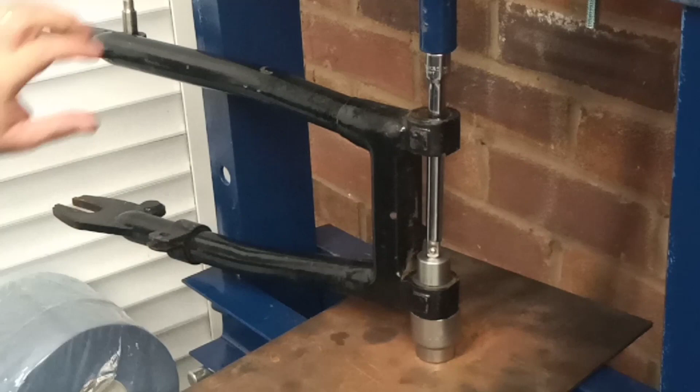Right, welcome to Retro Circus. Today's star attraction is Dino the Juggler, and I'm going to try and keep all this lot in line while I press out the swinging arm bearings. And I've got the special tool that I made in here. I've got a 1.1/8" socket down here to catch the bush and to support the bearing flange, and a socket extension going through the middle.

And we're doing it like this because, if we try to press from the top, this being an open H sort of format, then we'd absolutely distort the swinging arm at that end, I would think. So hopefully this won't take much force to go. Well, I'm going to get out of the way just in case. There we go. Not too bad. Not too big a bang, really.

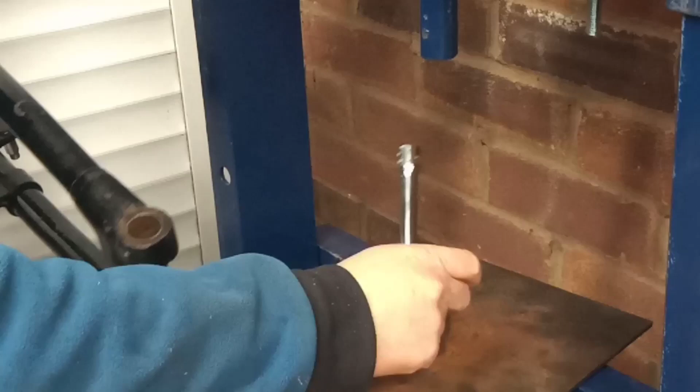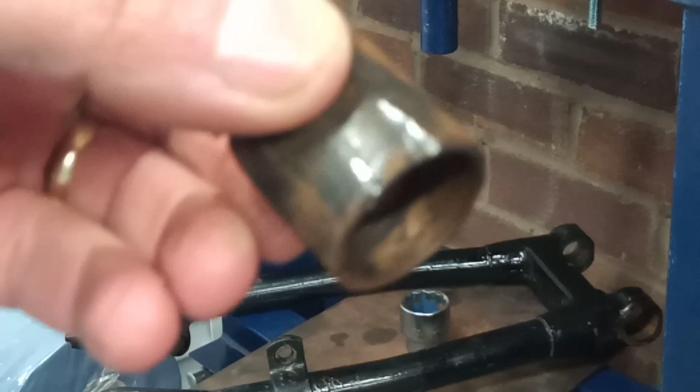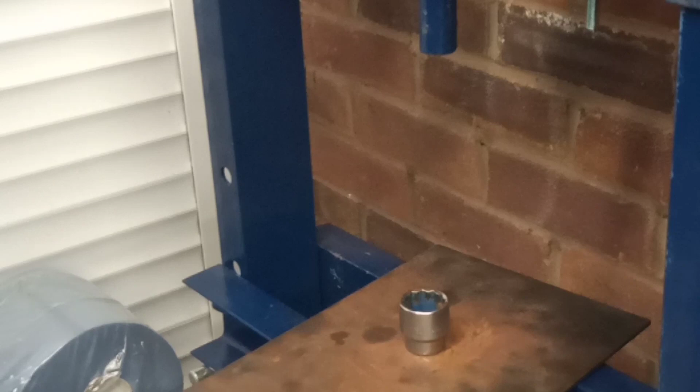There's one. I think that's probably never been out of there. I imagine that's the original one. There we go. He took a bit of going, didn't he? But he went. Right, let's get the other one out. We'll do exactly the same again. Let me just back the jack off, which we've done. And do it all again. I was quite pleased with that, actually. Worked very well.

So if you can hear a bit of background noise, the camera tripod is right above where the workshop heater is. So you may just be picking up the fan from the workshop heater, but hopefully it won't spoil your enjoyment. It's absolutely freezing here at the moment. It hasn't been above about -2 for a couple of weeks now. So yeah. Proper winter weather.

I'm not happy with that. Let's just get that socket a little bit more lined up. I'm not happy with that at all. It's all a bit on the wonk. That's better, more natural. A bit more central. There we go, I think that'll work.

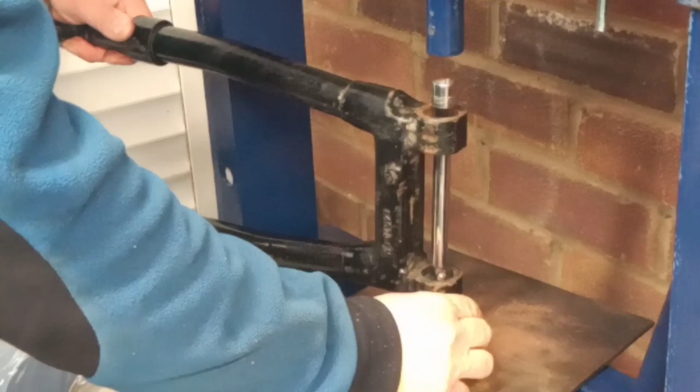It's wanting to wander about. Oh, that was just my big box of press tools at the bottom moving. There we go, that should work. There we go, liberated. Okay, well, it worked. Happy days. There's number 2. Again, I don't think that's ever been out, but you never know. Okie doke, we'll get the swinging arm cleaned up, get ready to put the new bushes back in.

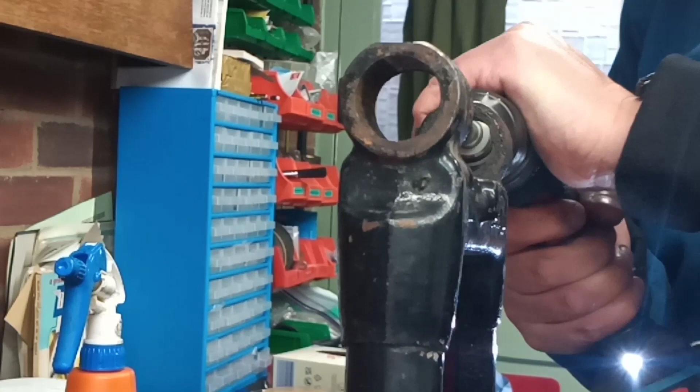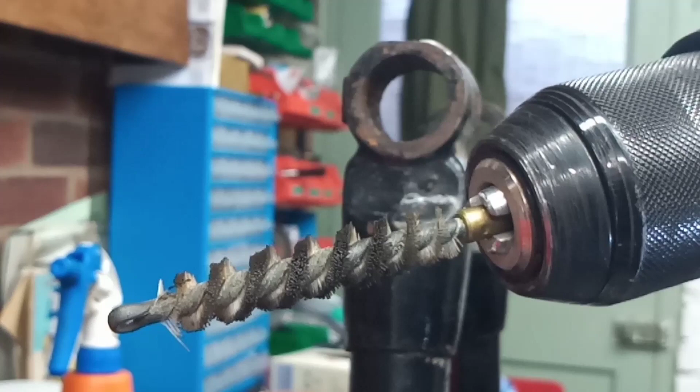Okay, I'm just going to clean out the bores. If you want to know what I'm using, it's a gun cleaning brush, part of a gun cleaning kit, in an electric drill, and because it's really stiff, can you see that? Really stiff nylon bristles, it doesn't do any damage to the metal at all, but it really cleans them lovely. If you've got any sort of bearing bores or anything like that that you want to clean without damaging them, these are ideal. It's just a spiral gun cleaning brush.

You just give it a bit of a going and then wipe it out with a bit of your squirty oil and a bit of workshop wipe. It's perfect. Gets all the rust out, doesn't damage the metal, and is ideal for the job.

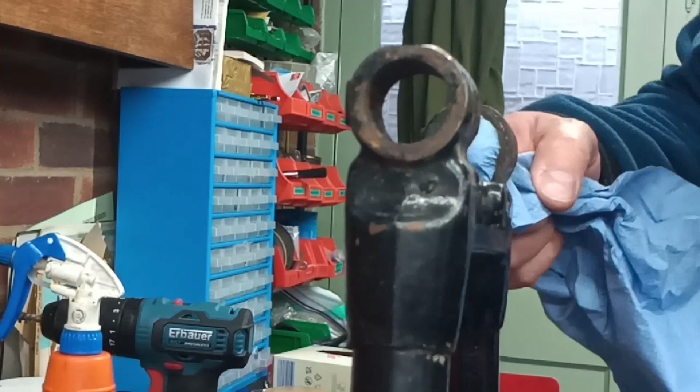So, just do this one. I don't know if I can keep you there. I might be able to. You'll be able to see it do its job. Can I get in there with you there? Maybe. That ought to do. I'll see if I can get the camera to look down there in a moment. They were pretty rusty in there.

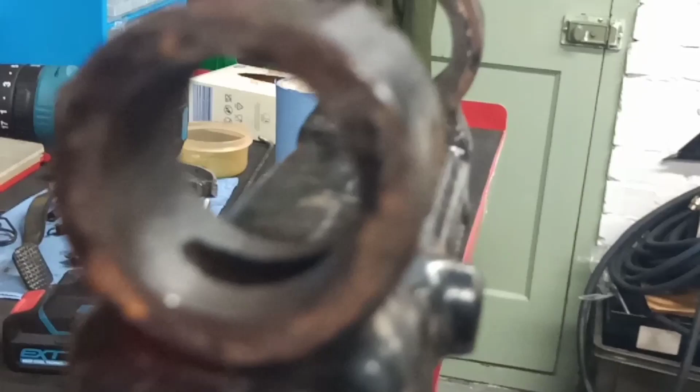There we go. Let me see if I can get you to have a look down there. Excuse me manually operating the camera. I don't know if that's going to focus. Well, yeah, all the rust's come out. It's just clean metal now. So we should be good to put our new bushes in.

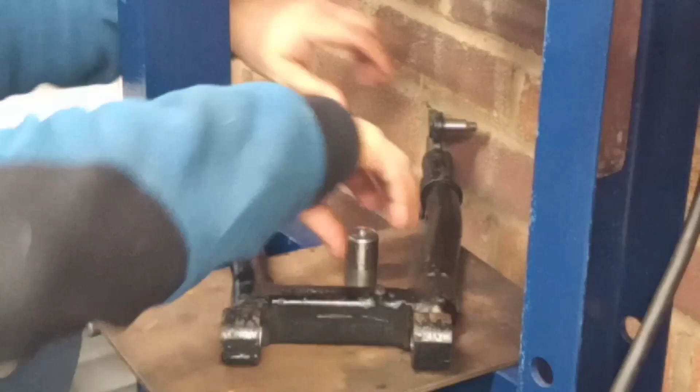Right, we're back again. We're going to put one of the new ones in, and I've warmed it up a little bit, just because I think the minimum amount of resistance we get, the better, really. Which one did I warm up? That one. So I doubt it'll make much difference. Oh, it's going in a bit easier. Starting easier, so that's definitely made a bit of difference.

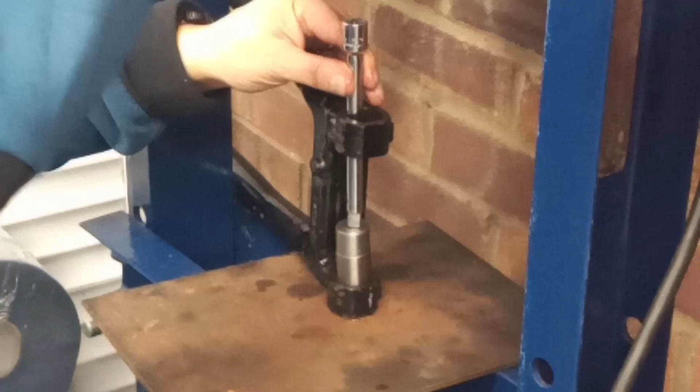Okay, so put our rod in, and we'll get the jack in position. I'm hoping that you've seen all this well. Let's just see if we can get this a bit more square before we start putting force onto it. No, that's not going to play. I think I need something a bit chunkier than this socket extension, perhaps. So one more go. If it doesn't work, it doesn't work. We'll get something else.

Okay, so that's starting off reasonably square. Might help if the swinging arm is out here, so I can handle it a little bit better. Oh, I think that's better. I think it's just where I had the swinging arm. I was just in a bit of an awkward place. Put a little bit of grease around the outside surface of the bush. You notice I've got no socket underneath now because I want to come to a dead stop. Which is where we are.

Okie dokie. Success! Let me get you a view of that. There we go. A little bit of grease pushed through. And that's one done. And I shall do the other one off camera because you've already seen it. So get the other one in and then we'll see what we're like for dimensions.

Right, well, we have our swinging arm up in the vise, and there's our two bushes that we just fitted over at the press. I don't know if you can detect a slight hint of shininess right around this edge here. I did find that it raised up a little bit of a burr, and I just had to remove it. I used the edge of this needle file as an improvised scraper, and I just went in there and took it out. And it's nice and smooth now. You can run your finger around, so no problems there.

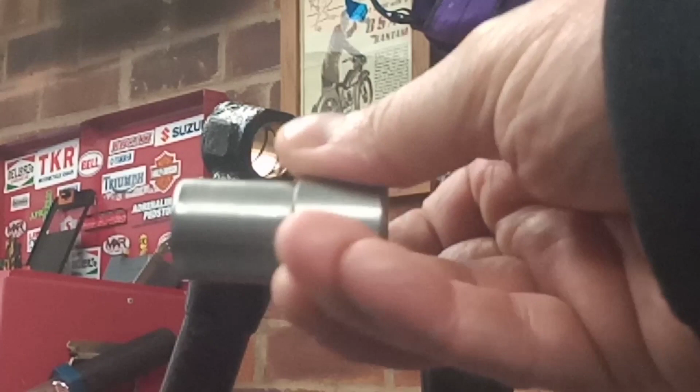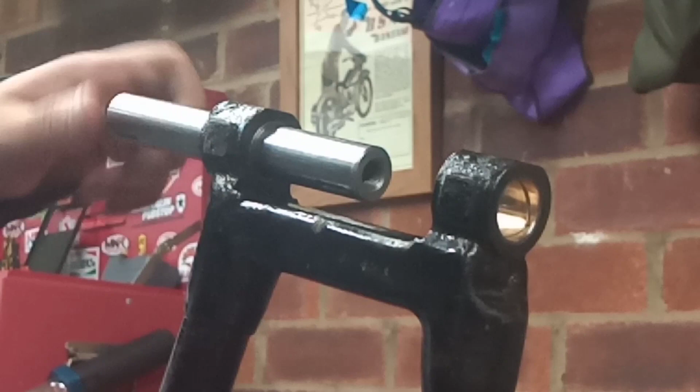But I'm really happy because I have had the pin fitted, and let me just show you. You'll recall that we used our guide tool, which was a good close fit, to try to prevent the bushes from closing up, and I warmed the housings up slightly before I pressed them in, the flanges, and that's a really nice fit in there. And then we get over here, and with just light thumb pressure, it's in. And I can rotate that by hand. There's a bit of drag on it, which is absolutely fine.

If I was going to ream it, that would be the fit I would be going for. I wouldn't be going for anything slacker than that, because that will work perfectly well, particularly when it's greased up. You want a tiny little bit of drag, and yeah, I'm really happy with it. That's absolutely spot on. So let me just press it out, and as you can see, I just use my finger to press it out, so it isn't a tight fit or anything like that. But yeah, I'm really happy. So we don't have to do anything else to that.

And guess what I did? In anticipation, I actually did buy a reamer, and I said I wouldn't, didn't I? But this fella came up for £8 second hand, and once I cleaned all the swarf that the previous user had left on it, this is what we're left with. It's a couple of edges on the blades, could probably do with a little tickle on the stone, but apart from that, it's like new. You could use that straight away and get away with it.

Of course, you couldn't just whack this reamer through there, because the whole point is that you're reaming them concentrically. So the plan was to make a conical guide, a pilot, and if any of you remember kingpin reamers, if you've worked on old Morrises or Commer vans or anything like that, you'll know what I'm talking about. That was basically the plan, but I don't need it. However, I do have another swinging arm in here that needs to be done. I've nothing to use it on at the moment, but I'm going to do it anyway. So I'm going to make the kingpin guide for our adjustable reamer.

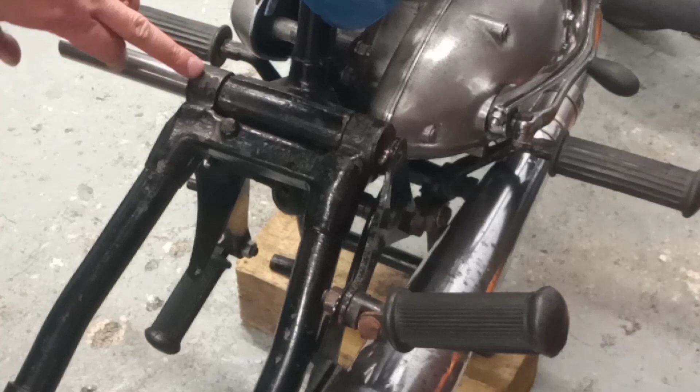Right then, lovely people, I've got you up on the parts washer, peering down at the back end of the bike, and what we're doing is checking the end float, or side float if you prefer, on the swinging arm. As you can see, it's partially fitted. We've got the pin through the offside eye end into the offside part of the frame, sufficiently in to hold everything nice and square. We're hard up against the offside side of the frame lug, and that puts us on the centre line. And here we have a gap.

That gap is controlled by a thrust washer. Let me just get the caliper - because I've already been... nope, let me just drop it on the floor first, that's always the first sequence of events. Right, clean it a little bit. There we go. So I've already been measuring things, and we have got 65 thousandths on our thrust washer.

And then I've got a feeler gauge stack here which measures 70 thousandths. And if I hold that, take a little bit of the weight off the swinging arm, make sure it's nice and square - I don't know if you can hear that, I'll try and exaggerate it a little bit - but it's what I would call a good feeler gauge fit. So if we put our 65 thousandths thrust washer back in there, we're going to have a gap like a donkey's yawn, aren't we? So that's no good. So next job is to make another thrust washer at 70 thousandths. I'm going to go away and do that, and hopefully we'll get our swinging arm back in.

Well, we found our sweet spot, parting off the thrust washer. That's 120 RPM. And this is a bit of S45 420.

Which is a martensitic stainless steel. You'll find this material in quite a number of places - nuts, bolts and washers - anywhere really where you need good corrosion resistance, where your yield strength isn't so important, but you still want a reasonable yield strength, somewhere around 450 to 500 megapascals. But the good thing about it, because it's martensitic, is it's heat treatable, very much in the same way as a carbon steel would be. So if you do need to harden it up, you have those options.

I'm just parting off now, as you can see. I've put a quite, not overly generous, but reasonably generous chamfer on the edges with a file, and I didn't want to mess around changing the parting tool now that I'm in there. But yeah, we'll get it parted off and carry on with our job installing the swinging arm.

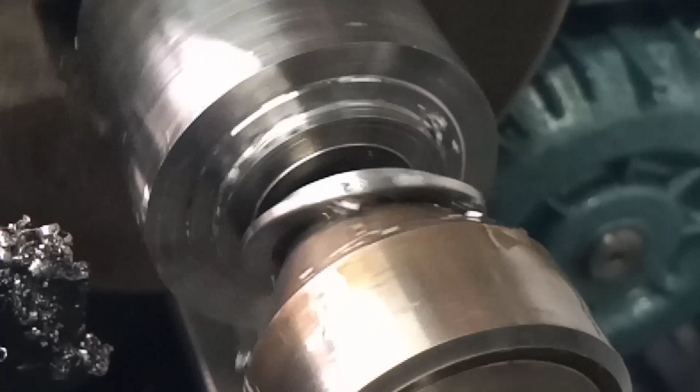There we go, we have liberated it. So I will get that cleaned up, and then we'll check it for dimensions. This being a metric lathe, I obviously had to convert my 70 thousandths into millimeters, and so we're probably a little bit over, just for ease of using the travel dial. So we can always bring it back on the stone if we need to, but we'll see how we get on.

Can you see that? I hope you can. I've just cleaned it up, and that's where we're at. So, are we going to live with that? Too right we are - half a thou, half a thou between friends. So we're not going to quibble, and that's going to be our shim, our thrust washer, rather, whatever terminology you care to use. So, yeah, happy with that.

Onwards and upwards. Right guys, we're getting ready to put our swinging arm back in, and I've just had a bit of a tidy up of the bench. It was looking like a disaster movie.

Last weekend my eldest son and I fitted some oak shelves up in his bedroom, and that was a nice little project that we did together, but I left basically everything that we'd been using all over the bench, so it was hardly conducive.

Anyway, I've got that tidied away now. There's our thrust washer. This material, the 420, comes in at about 230, 240 I think on the Brinell scale for hardness. I've just given it a quick quench and temper back just to see if I could improve it. I've no means of testing it obviously in here. I know some of you guys have got pre-cip ovens and hardness testers in your workshops - I can hardly get in mine, so that would be a pipe dream to me really. But it won't take a file, so I'm estimating we might have improved it to maybe 270 or 280 or something like that. To be perfectly honest, I could probably have left it well alone, but I just thought I'd have a bit of a play with it and see what happened.

Anyway, we're just about ready to go back together, and while I'm waffling on about materials, which I haven't done for a while - if you haven't got facilities to do hardening and things like that, a lot of the time you can select your materials, and with a little bit of compromise and a little bit of research, you can find stuff that will do the job for you. I'm just going to waffle on a little bit longer about material choice. You might find it informative, I don't know, you might not, but bear with me.

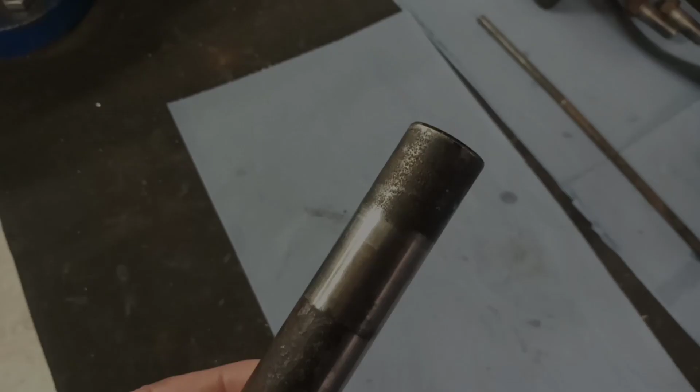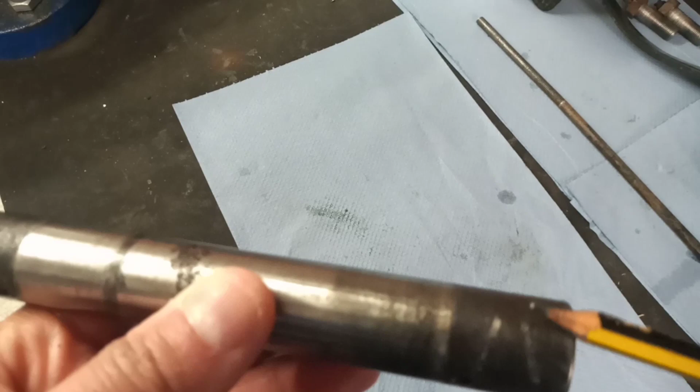Right, we're looking at our old swinging arm pin, and I think we were right to replace it, don't you? It's had a bit of a life, and largely the defects are caused by corrosion. We've had our perfect storm of a corrosion cell at the bush locations - the clearance of the bushes with the pin inside, dissimilar metals, and just enough room for a nice effective electrolyte layer with our rainwater and whatever's thrown up off the road, probably impurities and grit getting embedded into the soft material of the bush, scoring the material and creating the perfect environment for corrosion to take hold and attack the metal.

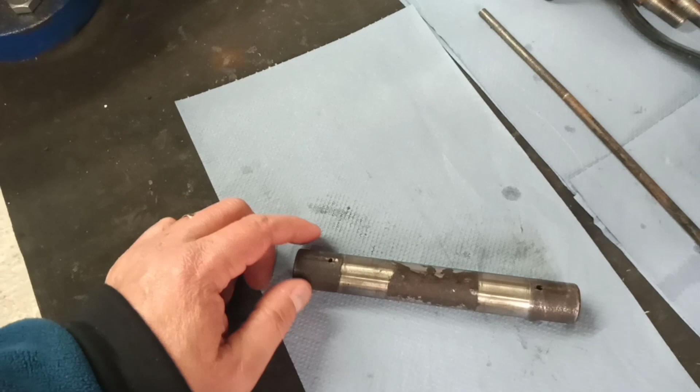And yeah, definitely past its best. If you watched my previous video when I removed this thing, I spoke about the potential of manufacturing one in the home workshop, particularly seeing as these things cost about £40 to buy, and I only know of one supplier in the UK that does them, and they're not always available. So making one seems like quite a good option.

Now, one of my viewers, Chris, who is very knowledgeable about British bikes and has done a lot of maintenance and work on them over the years, commented and said, well, you know what Dean, actually when you think about making one of these things, £40 doesn't sound like a lot of money. And he's absolutely right. When you break this down into a series of processes - you've got rough turning, drilling and tapping, milling for the grease pockets, heat treatment, and grinding back to final size.

And if you've got all of the facilities to do that in your home workshop, if you're lucky enough to have all that, then not a problem. But if you don't, and you have to farm that out to somebody else, then yeah, your £40 suddenly seems like really good value. I don't have those facilities - no precip oven here, no cylindrical grinder, no hardness tester. So yeah, it would certainly be a challenge to perfectly replicate this pin in this workshop.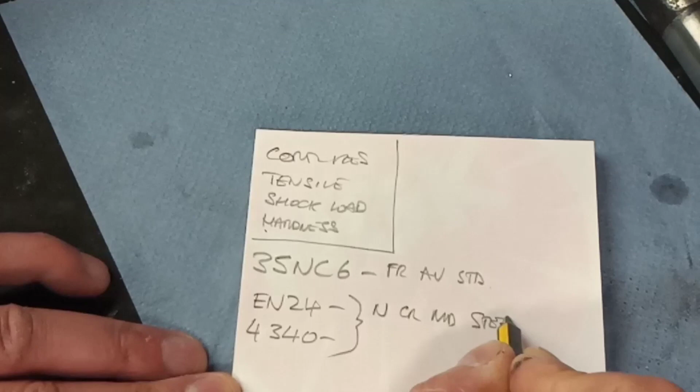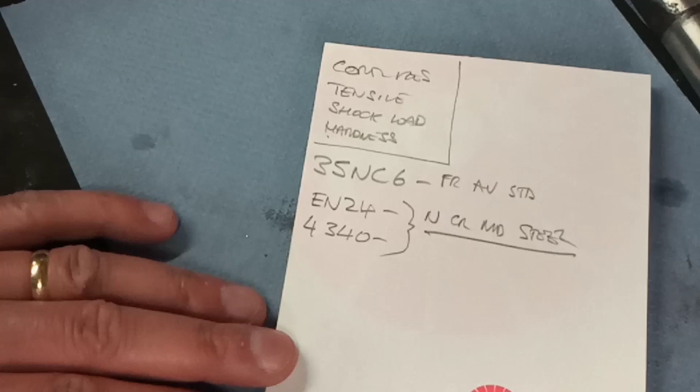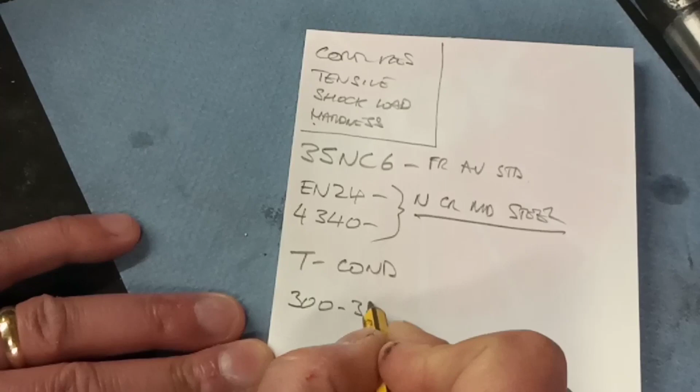And what is it? Well, it's a nickel, chromium, molybdenum steel. And it gives us all of these properties without needing any special treatment. So let's talk about some of the properties that we get. As supplied, it comes in T condition, and T condition gives us about 300 to 310 Brinell hardness. It gives us 850 to 1000 megapascals in tensile strength, and it's very machinable.

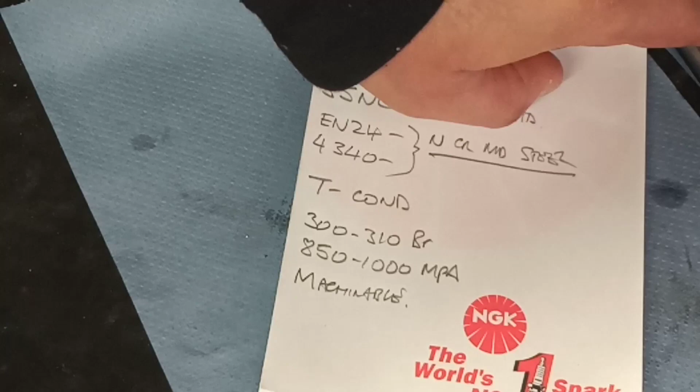It is tough, don't get me wrong, it is quite a tough material, but you can machine it. I've done it before using tip tooling, and my lathe would handle it. So most of the lathes that you've got out there in your workshops would also handle it. I think if you turned it between centres and you were careful with your sizes, you could manufacture with good surface finish a pin that would do the job.

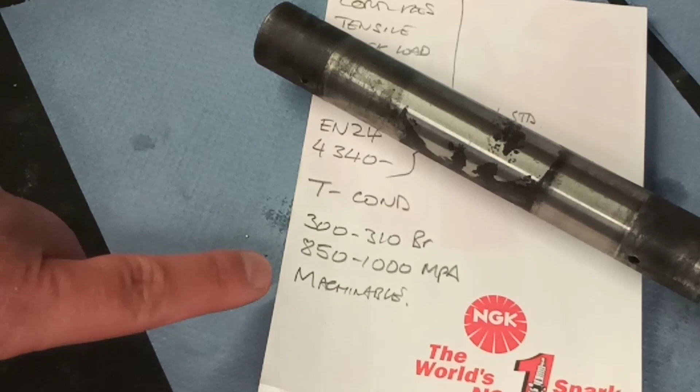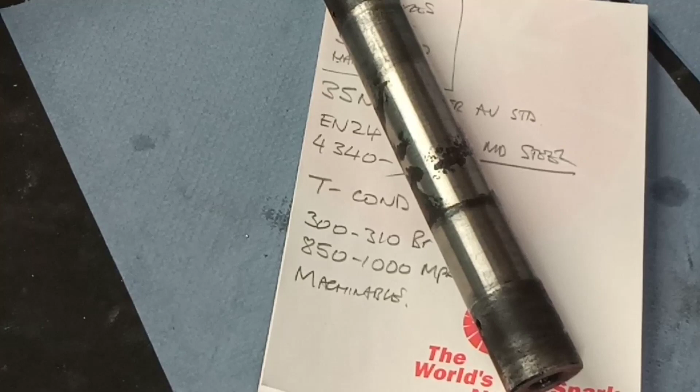And I think that these strength and hardness characteristics, particularly if you consider we are going to lubricate, we're on top of our maintenance, we probably over maintain our bikes these days. Back when these bikes were used by people to get around, they were probably just used and abused, whereas we tend to keep on top of our maintenance. I don't think you're going to have a problem using that material, and obviously you won't grind it to a precise size like they did at the factory, but don't forget, we will machine our pin and then we will ream our bushes to suit our pin, so we can get around any slight discrepancies in size that way.

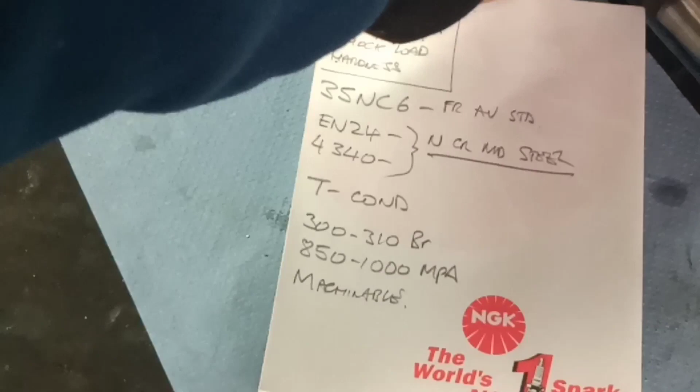But I think we can hit sort of, I think they're 990 or something like that, or 980, I can't remember now. I think we can hit those numbers with the lathes that we've got, and yeah, that would be my answer.

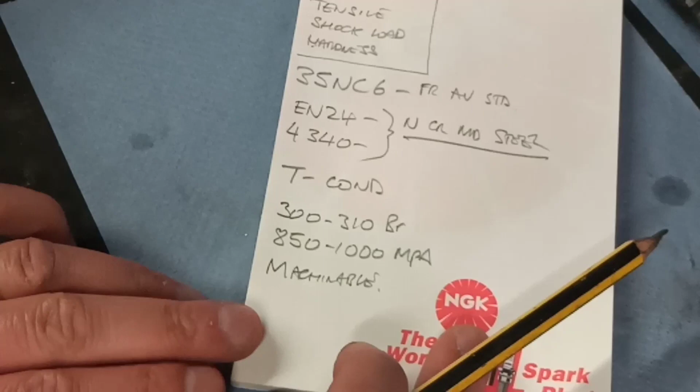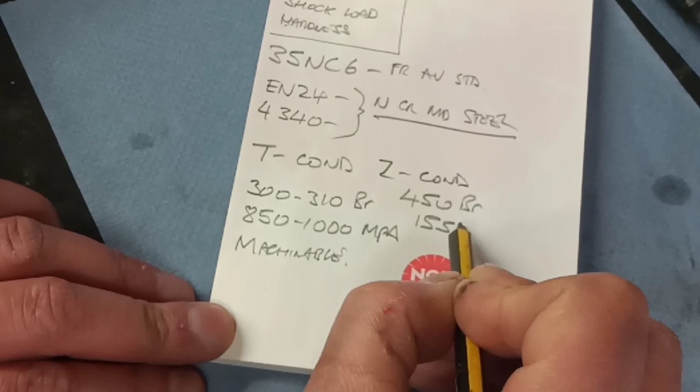Now, this material is heat treatable, so if you do possess the facilities, you could buy it in the T condition, and you can heat treat it all the way up to what they call Z condition, and that gives you about 450 Brinell on the hardness, and takes you up to about 1550 megapascals on the tensile strength.

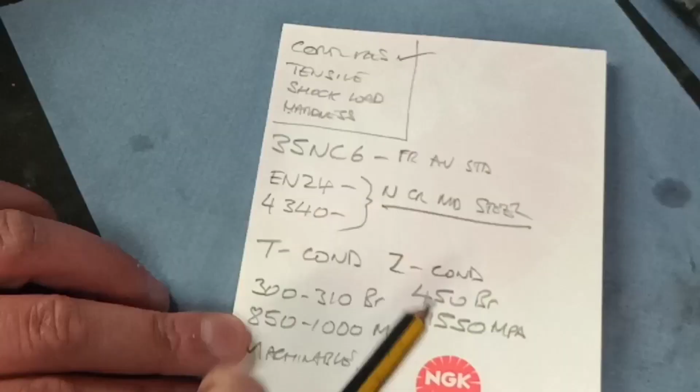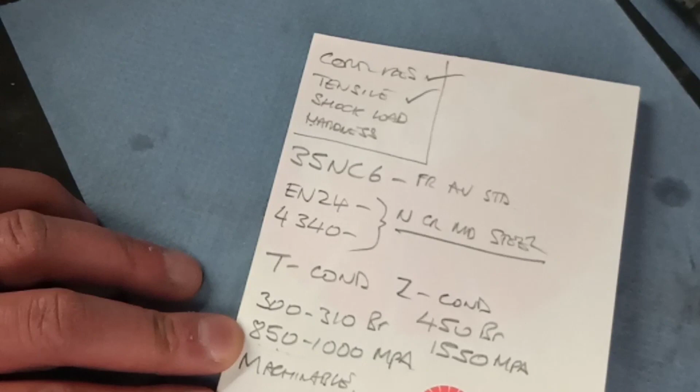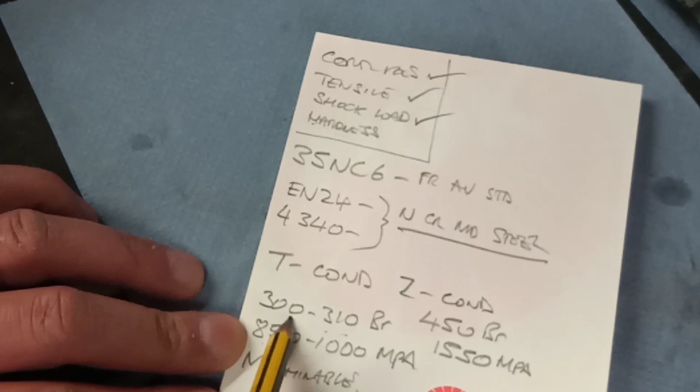As I say, it ticks the box for corrosion resistance. The chrome and the molybdenum help us with that. Between 850 and 1550 if you possess the heat treatment, but certainly a minimum of 850 megapascals on the tensile strength ticks the box there. It is good. It has good shock load characteristics, so it's not just going to fracture the first time you go over a bump. And we've already talked about a minimum of 300 Brinell straight out of the box, so reasonably hard from the get-go, which is what we need really.

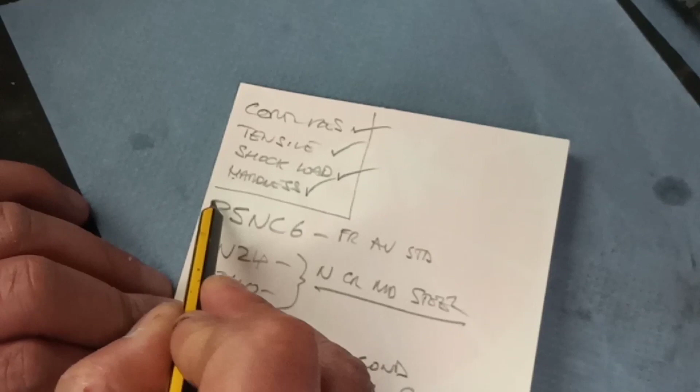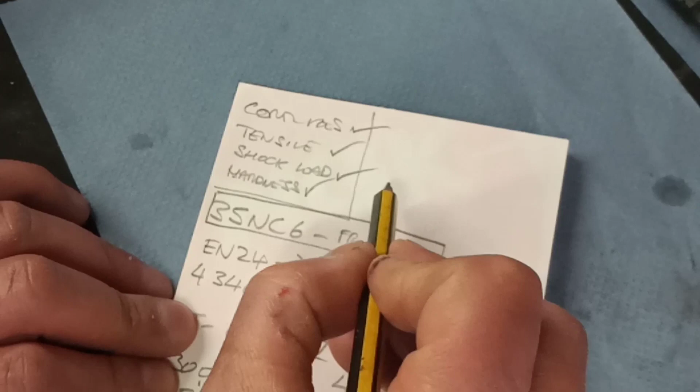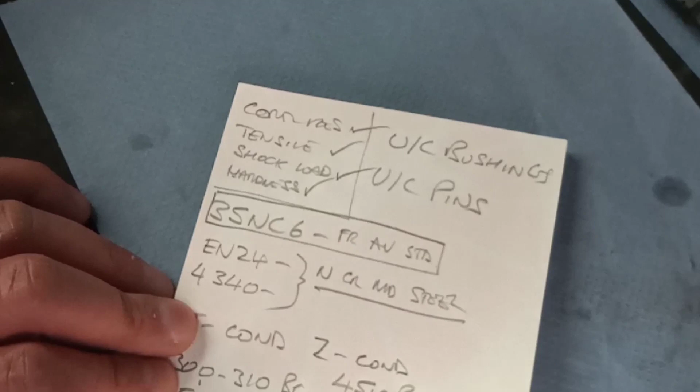And I spoke about the aviation standard. This stuff is used in the aircraft industry quite extensively, and some of the stuff that we've used it for is undercarriage bushings and undercarriage pins, retraction pins and things like that. So my final word on it really, if you like, is if you can land an aircraft on it, I'm pretty sure it will hold the back end up on your BSA Bantam or your Triumph or whatever it is you're working on.

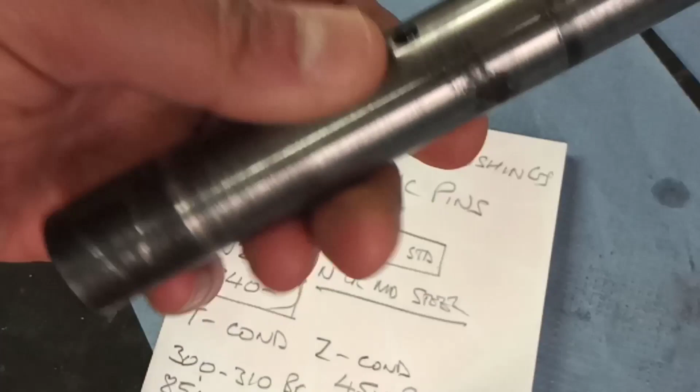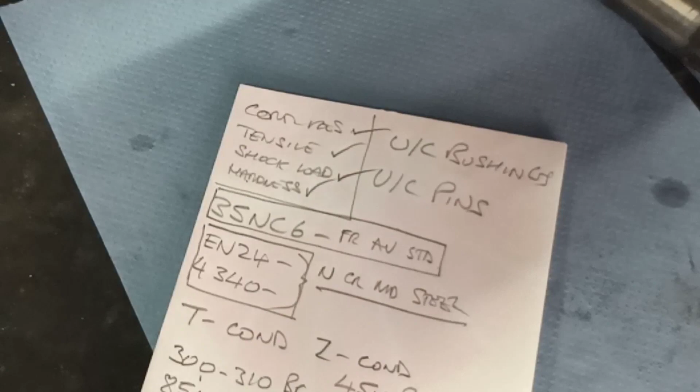So EN24 or 4340, and I can buy that in the UK. I can get a 300mm length. I think it's an inch diameter. Curious mixture of imperial and metric, but there you go. I can get that for about £20, or 18 to £20. So we've got a good project to do, and we save ourselves probably 50% on the cost of a new one.

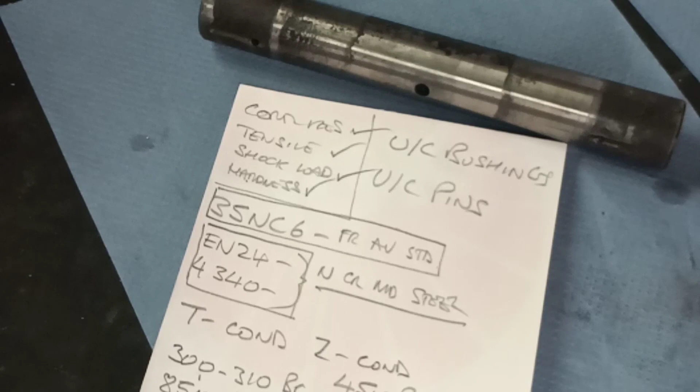So I hope that was informative and gave you a little bit of food for thought. Maybe not, but there we go. Waffle over, I promise you. Okay, let's get on.

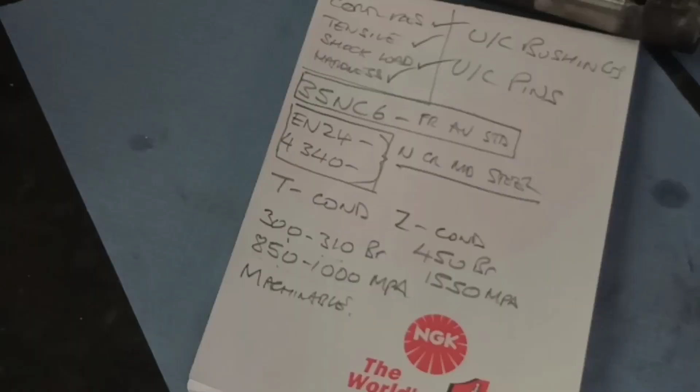Okay, we are getting ready to fit our swinging arm. Let me just get you a better view. Apprentice Edward is holding the swinging arm and guiding the thrust washer.

And we've greased up with our red and tacky grease, so everything is red and everything is tacky. I'm just going to put a little bit more on the pin just to guide it in, and then obviously we'll clean up the excess when we're done. But this is it, this is the moment. We're going to tap the pin in. I'm probably building it up into a bigger drama than it really is, but here we go.

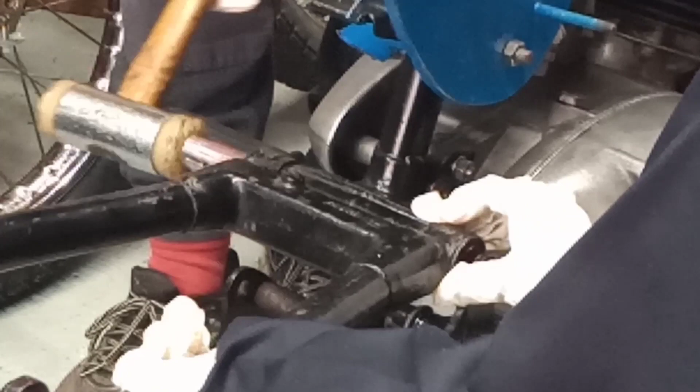See how we get on. That's going through very nicely. It's just going to guide the thrust washer. If we come to a shuddering halt, it looks as though we picked up the washer.

There we go, we're in. Right, moment of truth. Does it move up and down, Edward? Can you wiggle it up and down? You can wiggle it up and down. How does it feel? Let's have a feel. Can you let go a minute? 1 second. Oh yeah, that's like silk, isn't it?

And the next thing is, grab a hold of it. Can you move it side to side? No, absolutely nothing at all, is there? Let's have a feel. Yeah, I think we've achieved our aim there, don't you? Right, you grab a hold of that.

Next thing we'll do is we'll get our pivot bolts back in and get everything basically reassembled to how it was. So I shall get ready to do that, and the next time you join us we'll be putting our pivot bolts in and just reassembling generally.

Right, we are looking at our swinging arm pivot pins, or swinging arm pivot bolts, and I have to tell you, we've reached a bit of an impasse, hit a bit of a snag, largely of my own making, well, through my own negligence really. These two fellas have been enjoying an extended spa break at my exclusive parts washer resort, and they have been a little bit out of sight and out of mind. I've come to fish them out and clean them up so that we can get them on the bike,

and obviously we have British Standard cycle threads here, but we don't have British Standard cycle threads in our new pin. And as soon as I fished them out and saw these threads, I thought, they're not going to be compatible. I've been working with the pin quite a bit, obviously. It's been in my hands quite a lot, and yeah, I immediately thought, well, they're not the same threads. And I assumed, wrongly, that the new pin would have the same threads as the old pin,

but yeah, clearly not. I have measured them now, and quite disappointed to say that they're metric, and they're a 1.25mm thread, and it appears to be M12. Now, M12 is normally 1.75, but there is a metric series called Superfine, and that's what they are. So, yeah, we've ground to a bit of a halt. I think it would be too many steps backwards to pull the pin again and to try and get another one, or to go through the manufacturing process that I spoke about earlier.

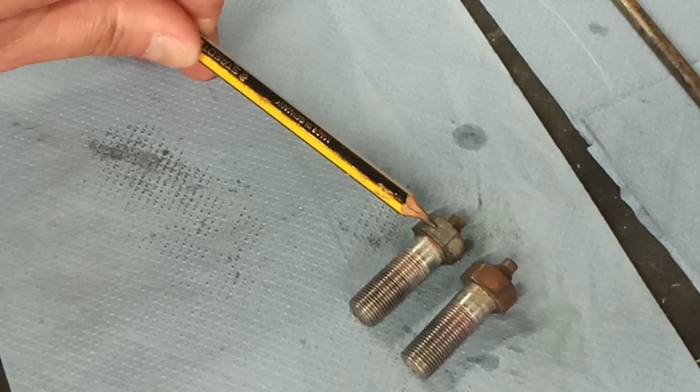So we'll keep the 9/16 AF flats. We will keep the 2BA grease fittings, although we'll get some new ones, new bolts, new grease fittings. And obviously this shoulder here, which corresponds with the frame components, we'll put this in, but we'll put our M12 1.25mm threads on, and we'll do it that way. That will be the compromise.

So I'm going to have to go away and get the materials that I need to make these things, and so that's where we're going to leave the video. We didn't get to complete it this time around, but the next video hopefully will be making these bolts and getting the job somewhere near complete.